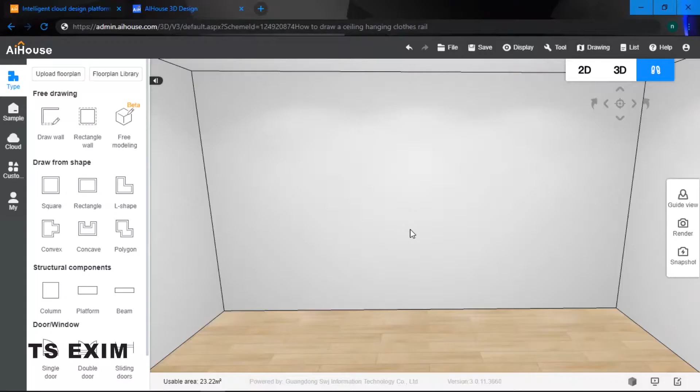Okay, so let's get started. Firstly, come into our customization function and we can use the kitchen cabinet function. Once we are in, I'm going to look for a superboard, also known as a super plate, and drag one out.

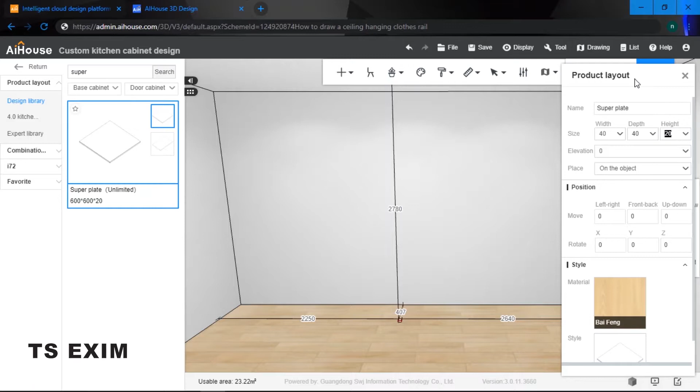Now I'm going to resize this super plate. For my width, I'm going to put in 40, for my depth, 40, and for my height, I'm going to turn it into 1500.

So as you can see right now, I have a long rectangular wooden stick. Since it's rectangular, I'm going to change it to a circle, a circular long wooden stick.

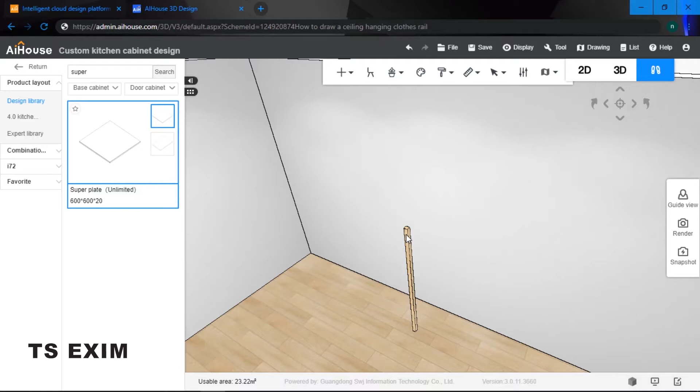Hold on to B, click on board selection mode, right click, panel point editing. As you can see, these 4 edges is what we are going to change and edit. Click on the first one and select an outer fillet.

Our radius we will make it slightly lower, 30. So we are going to repeat for all 4 edges.

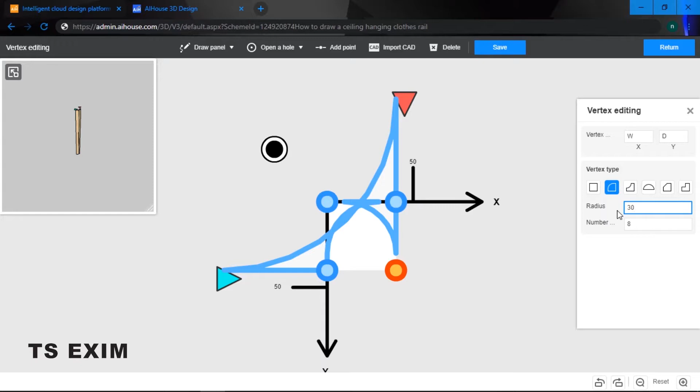Same thing, we select outer fillet and put our radius to 30.

As you can see, after completing all 4 sides, I save it and return. Right now it turns into a circular long wooden stick.

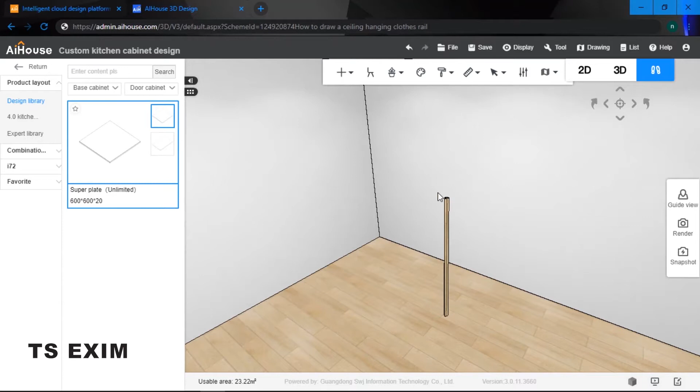So as we know, we have the stick and also the cap, which is connected onto the ceiling and one onto the wall. For the cap, we are going to drag another super plate out.

Now I'm going to resize this. For my width, the cap width is 120, the depth is 120, and for my height I'm going to change it to 40.

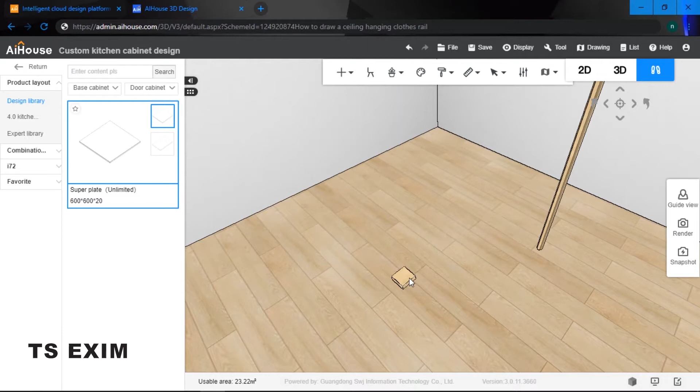So I'm going to turn it into a circle. Same thing, board selection mode, and we are going to use the panel point editing function. As you can see, it's a square wooden box, so I'm going to turn it into a circle.

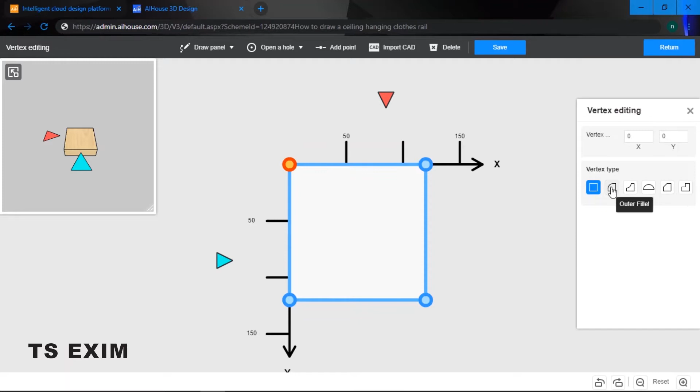Same thing, outer fillet, and for our radius I'm going to make it 60. Repeat for all 4 sides.

Outer fillet and 60 for our radius.

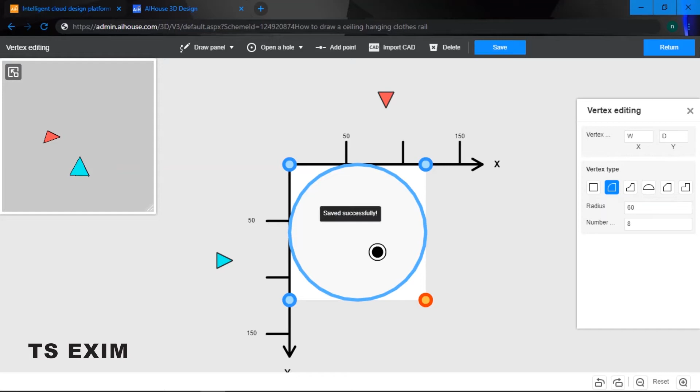Once we're done, we will see a circle. Save it, return. Now I have my cap.

I'm gonna put it over here, and then for this one, my elevation, I'm gonna put 40, since I want it to be on top of my cap.

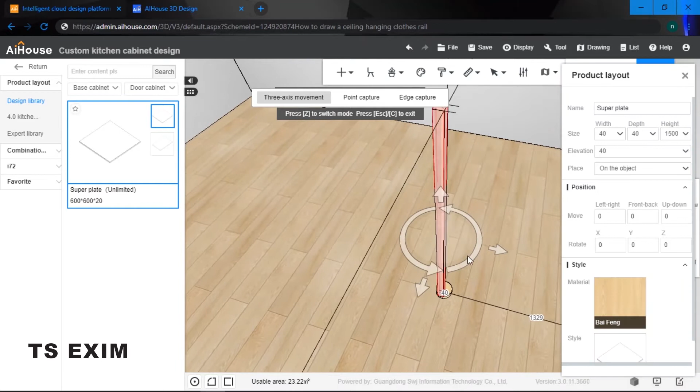So we can press on Z, and then we will see all these arrows, and we can adjust them accordingly. Once we are done, I can actually copy.

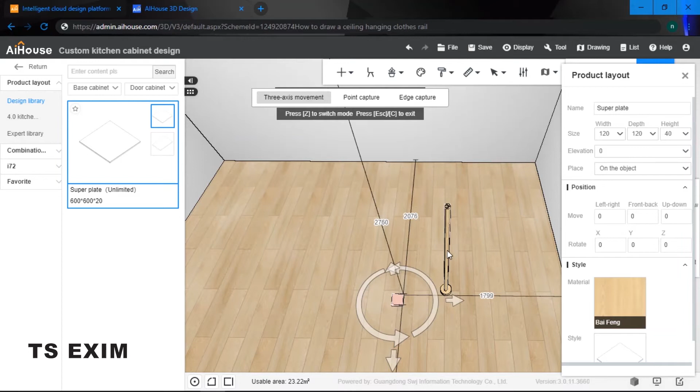Copy one more out and then copy another one, and then we fix them together.

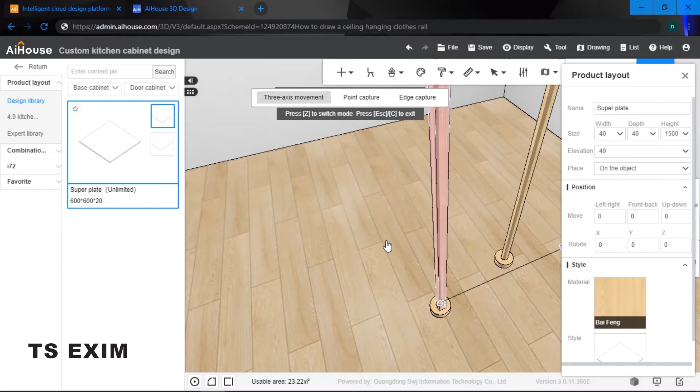Once we are done adjusting both of this, we can hold on to control and group this up, and favorite it.

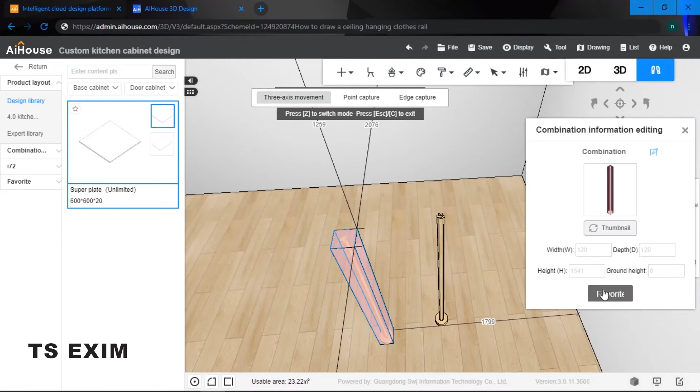Confirm, and then repeat another one. We're gonna group this, favorite it, and then confirm.

Once we're done grouping them up, we can hold on to the shift, select the entire thing, and hold on to Z. Now we can rotate.

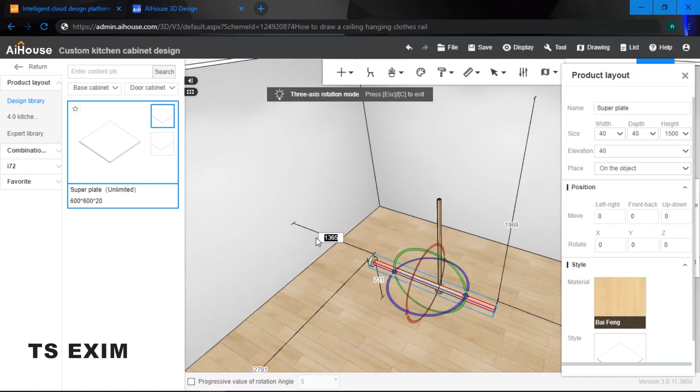Here I'm gonna put it 0, sticking onto my wall, and for the elevation, 1500.

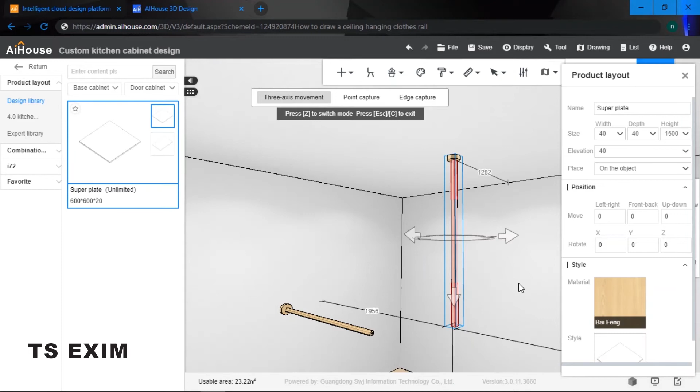This one I'm going to twist it over 180 degrees and then push it right on top onto the ceiling.

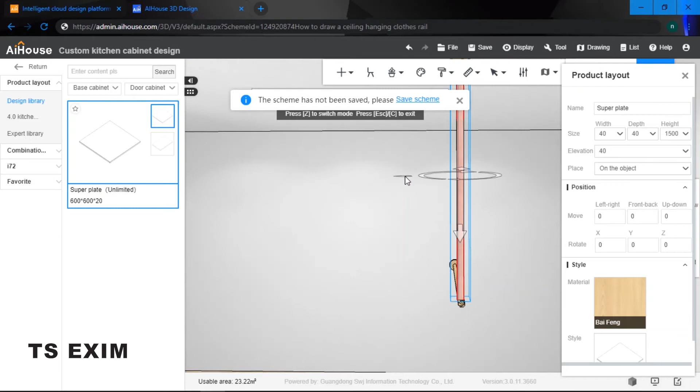So now I can actually adjust them. This one, push it slightly higher a little bit, intersecting one another.

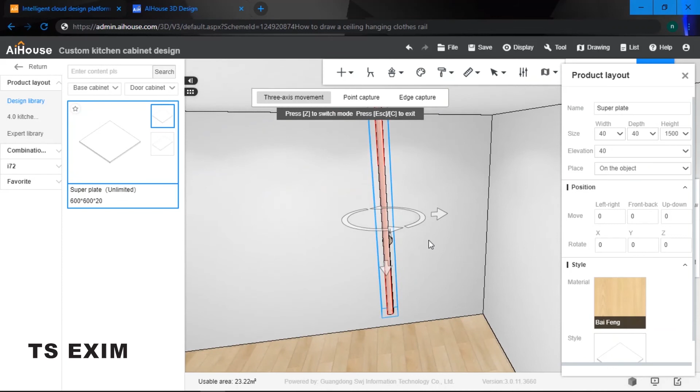This one might need to pull out a little bit more. Alright, so I have my clothes rails done.

So the next thing I'm going to do is that I can actually change the material if I want to. I'm gonna change it to black.

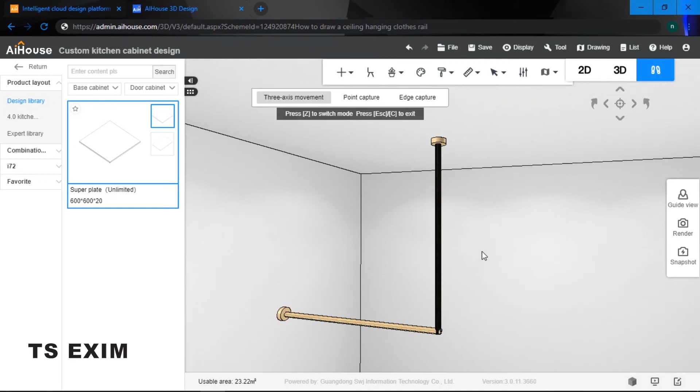So I can right click, and then I'm going to click on format painter and paint. Paint on both of these as well.

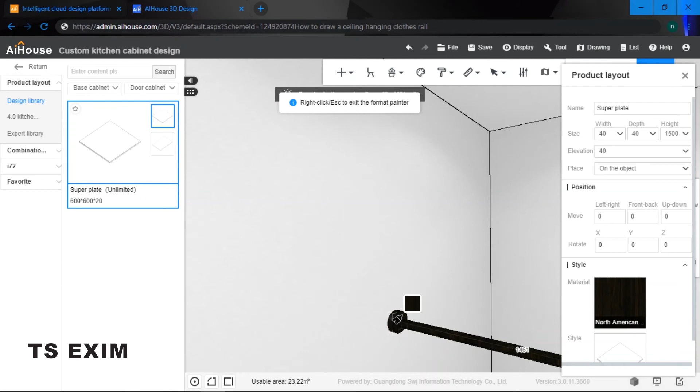After done changing the materials, I've actually uploaded this model, it's a hook, and I save it onto my favorites.

As you can see, I just drag it out and place it onto underneath mine.

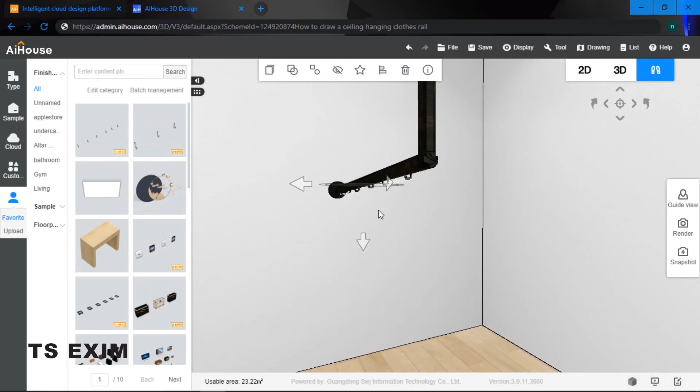If you can't really see properly, we can always go on to Control 3, which is where we can use the black and white mode, so for us to see.

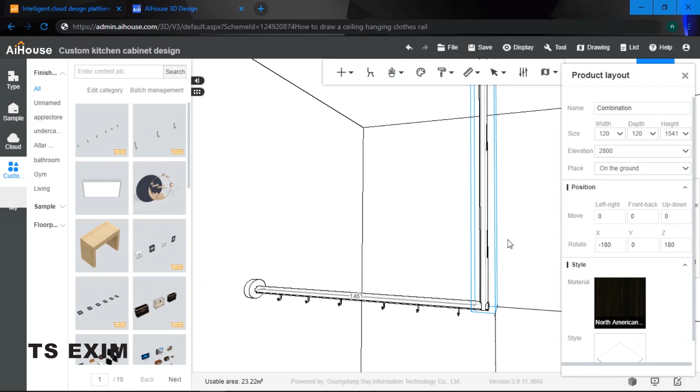Alright, so now let's go back, and there you have it.

So this is how to draw a ceiling hanging clothes rail.